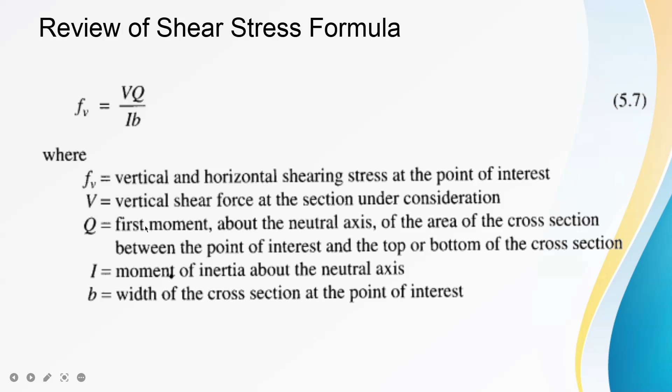But in this figure, the equation from the previous slide is based on the assumption that the stress is constant across the width b and it is therefore accurate only for small values of b. But given that yung ratio ng d to b natin is equal to 2, meron tayong error na 3%. While if ang ratio ng d to b is 1, error na mag-occur is 12%. While if the ratio is 1/4, the error will be 100%. And for this reason, the equation cannot be applied for wide flange section.

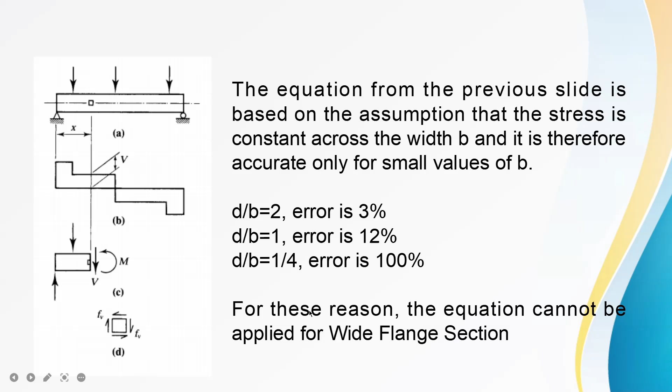At makikita natin that if we will be considering the shear diagram nitong ating wide flange section, mapapansin natin that yung shear stress within the flange section ay napakababa. Hanggang dito lang siya compared dito sa shear stress that is present sa ating web section.

At dahil sa malaking pagkakaiba ng ating shear stress at that point, ginawa na lang natin is to get the average web shear stress dun sa ating wide flange section. Kaya ang formula na lang is V over area ng ating web section or d times thickness ng web.

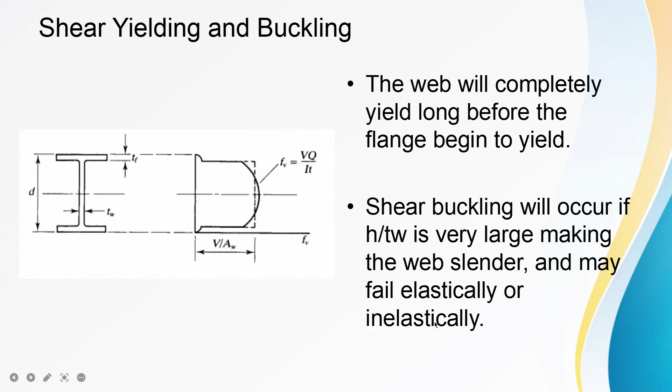Given this figure, realize natin that the web will completely yield long before the flange begins to yield. And shear buckling will occur if h over tw is very large, making the web slender, and it may fail elastically or inelastically.

And to compute or design members for shear, it is based on Section 507 of NSCP 2015. Two methods of calculating shear strength are presented below. The method presented in 507.2 does not utilize the post-buckling strength of the member, the tension field action. The method presented in 507.3 utilizes the tension field action.

And to compute for the design shear strength, that's just multiplying the nominal shear strength by our resistance factor, phi, whose value is 0.9, which is based on LRFD, and the allowable shear strength or the ASD shear strength is computed by dividing the nominal shear strength by our factor of safety na omega, na ang value niya is 1.67.

Well, for all provisions in this section except 507.2.1, ito yung ating gagamitin na resistance factor and factor of safety. Well, for 507.2.1, the nominal shear strength, this section applies to webs of singly and doubly symmetric members and channels subjected to shear in the plane of the web.

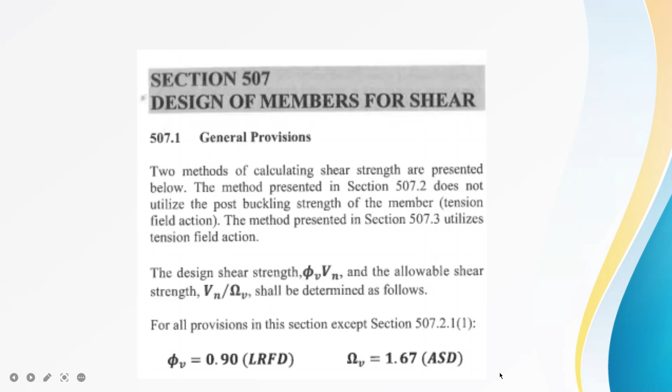But for case number 2 and the different sub-cases, ang gagamitin na natin is 0.9 at 1.67. Bali, for webs of all other doubly symmetric shapes and singly symmetric shapes and channels, except round hollow structural sections, the web shear coefficient Cv is determined as follows.

Bali, nakadepende pa rin siya sa width to thickness ratio at yung mga CV niya ay nakalista dito. Then after we obtain the value of CV, then proceed tayo dito sa pag-compute ng Vn natin. Then we have the provision for the web stiffeners. Kindly just read this one.

At ito yung illustration that can simplify our computation for the shear stress natin. Bali, nakadepende kasi yung ating shear stress sa ating width to thickness ratio. At if yung width to thickness ratio natin is less than 1.10 square root of kV E over Fy, yung ating shear stress is just 0.6 Fy times Aw since lalabas kasi na yung Cv natin is 1.0.

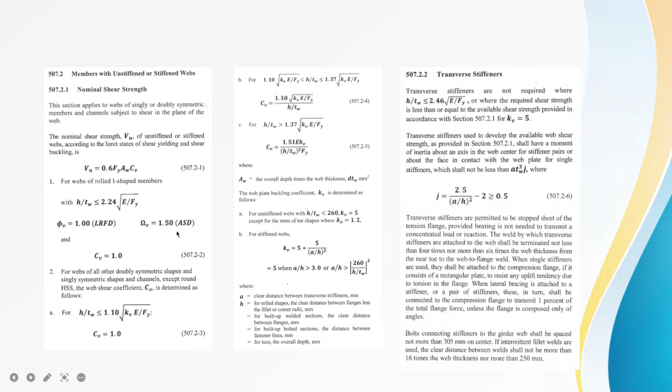But if it's beyond 1.37 but less than 260, the value of our shear stress is 0.6 Fy times Aw multiplied by the value of its Cv, which is 1.51 E kV over (h over tw) squared times Fy. Bali, mas maganda na masaulo natin ito para hindi na natin sauluhin yung longhand. Ito yung marami pang kwento-kwento na formula or yung codes natin.

Then there are other topics for shear, which is the 507.3, which is shear considering the tension field action, then single angle, rectangular and box hollow structural sections, round hollow structural sections, weak axis shear in doubly and singly symmetric shapes, and beams and girders with web openings. Bali, if you want to study this one, pwedeng aralin nyo na lang. But we will not cover this topic anymore.

But this ends our discussion for our shear, which is the sixth topic. For the computations, we will do that sa face-to-face session natin.

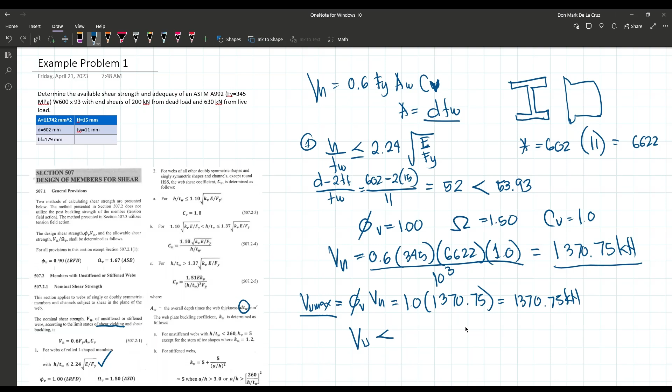And now, we have Vn. Let's compute for our Vu max or design available strength of our shear member. The available strength of our shear member is computed as phi V times Vn. At ang phi natin is 1.0 times 1370.75, or simply 1370.75 kilonewton. But kailangan natin malaman kung adequate itong ating shear strength, kaya dapat ma-compare natin yung available strength sa required strength. Ang required strength natin na Vu ay dapat less than or equal sa Vu max.

And Vu can be computed using our load combination or factored shear. Ang factored shear natin is 1.2 times VD plus 1.6 of VL or live load. That's 1.2 times 200 plus 1.6 of 630. So, ang Vu or required strength natin is 1248 kilonewton. Comparing sa available strength, Vu is equal to 1,248, which is less than Vu max na 1370.75. Therefore, adequate yung ating shear member to support our required strength na 1,248.

Then, let's use ASD. Yung available strength is just Vn divided by omega V. Ito si Va max natin. That's 1370.75 divided by 1.5, equals 913.8 kilonewton. Then, compute natin si Va. That's just VD plus VL, which is 200 plus 630 equals 830. Comparing Va with Va max, less than si Va compared kay Va max, therefore adequate din yung ating shear member using ASD.

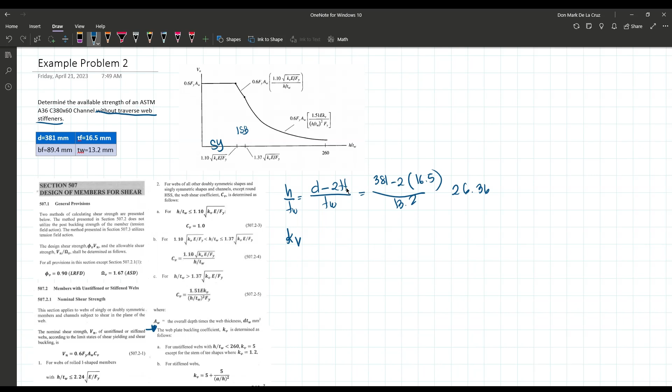And for this one, we will consider an unstiffened web. Dahil sabi sa problem, yung web natin ay walang transverse web stiffener. So, yung web natin ay unstiffened. Huwag kayong malilito dun sa types ng web natin, dun sa last discussion natin sa compression member, that itong channel section natin ay unstiffened or stiffened dahil sa points na to. Pero ang na-consider natin dito na unstiffened webs ay kung meron ba siyang transverse web stiffeners or wala. At sabi sa problem ay wala namang transverse web stiffeners, so yung kV natin ay equal sa 5.

And knowing the value of our kV, we can now compute for our limiting h over tw. So 1.10 of square root of kV E over Fy, that's 1.10 of 5 times 200,000 divided by Fy na 248. 248 dahil yung ating steel is A36, ang Fy niya is 248. At ang compute natin na 1.10 of square root of kV E over Fy is 69.85. And now compare natin si h over tw, less than siya sa 69.85. Therefore, dito siya mag-fall sa ating shear yielding na condition.

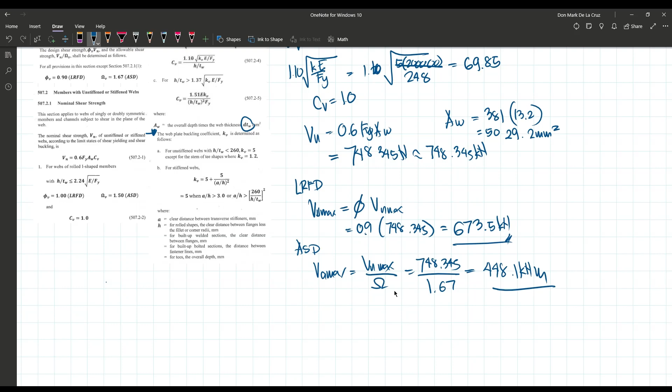And to compute for our available strength, ang gagamitin natin na resistance factor is 0.90 using LRFD and the factor of safety using ASD is 1.67. So LRFD, ating Vu max ay equal sa phi times Vn max, which is equal sa 0.9 times 748.345, and that's 673.5 kilonewton. Then using ASD, Va max equals sa Vn max divided by omega, or 748.345 divided by 1.67 equals siya sa 448.1 kilonewton. And that's our design strength using LRFD and ASD for our shear member na channel section.

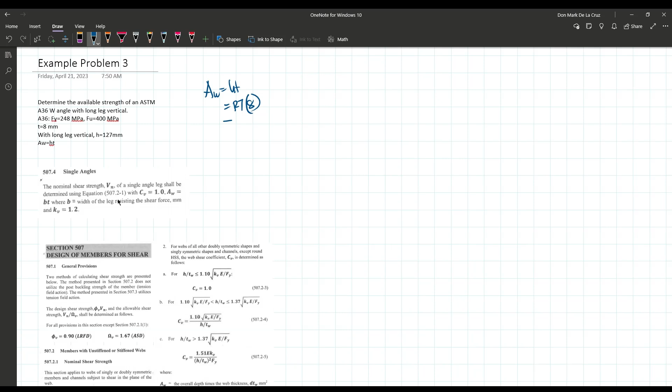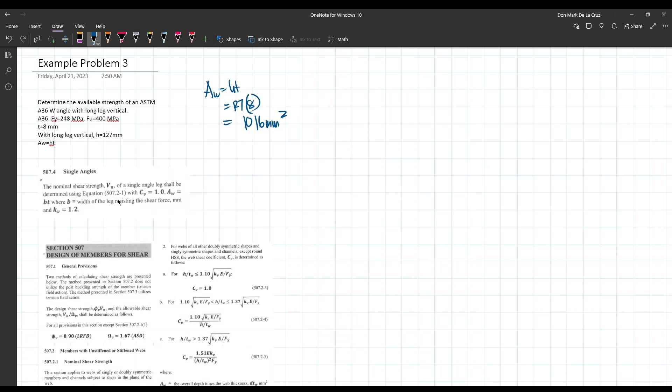Cv ay equal sa 1.0 at ang Aw niya is equal sa b times t, where b is the width of the leg resisting the shear force. At ang kv will be equal sa 1.2. And with this, let's start solving. Aw is h times t, and that's 127 times thickness na 8. And makukompute natin yung Aw as 1,016 mm squared. Then, proceed tayo sa section 507.2, hanapin natin kung anong case siya papasok. So, let's solve for h over t. That's 127 divided by 8, or simply equals sa 15.875.

Then, compare natin siya sa 260 para ma-define natin yung kv niya. And that's less than naman sa 260. So, we have our kv equal sa 1.2. Since kv is equal sa 1.2, let's compute yung ating 1.1 square root of kv E over Fy. And that's equal sa 34.22. Since h over tw is less than sa 1.1 square root of kv E over Fy, yung ating Cv ay equal sa 1.0.

And since na-define na natin si Aw and Cv, let's compute for Vn using the formula 0.6 Fy Aw Cv, which is from this equation, 507.2-1. So that's 0.6 times Fy na 248 times Aw na 1016 times Cv na 1.0, so we will compute our Vn as 151.18 kilonewton.